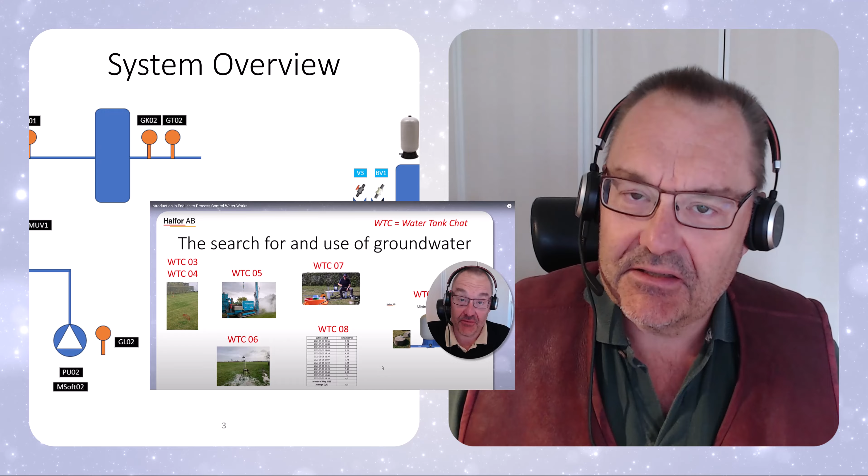Right now, I will hand over to Kjetil Sørhus at Sørhus Program Development, who has done the programming together with me for the process. So, enjoy the video now.

Thank you, Magnus. My name is Lars Kjetil Sørhus, and I run Sørhus Programutvikling in Kristiansand in Norway. I have a degree in process chemistry, and I work with automation and instrumented safety systems, specializing in Siemens PLC equipment. And today I will go through the control system for the Stånga groundwater works and show which main components should be in place on such a control system.

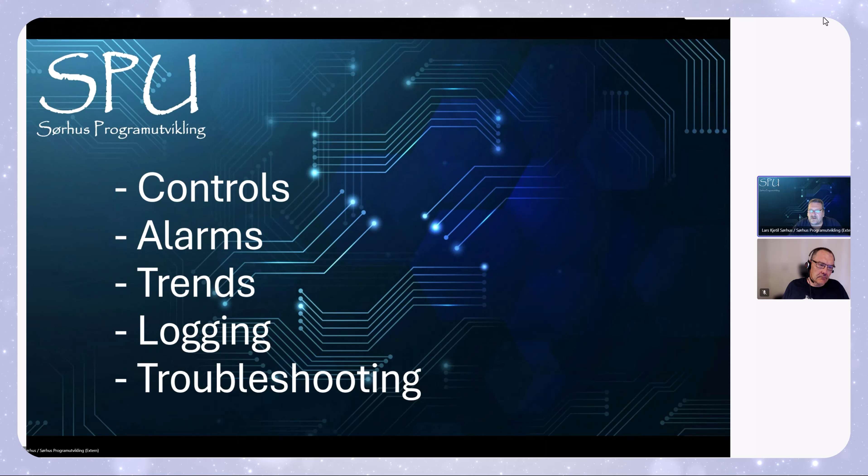I will start going through the HMI, that is the display system for the control system, and then go through the PLC program to show how it is set up in terms of process control and safety functions. And the main areas I want to focus on are controls, that is how the operator is handling the system, the alarms that should be shown in the system, the trends for the values of the system, the logging, and finally troubleshooting. That is how we can help the operator to remedy any problems that should arise during operations. So I think we'll jump straight to the HMI and start displaying how the system is shown to the operator.

Okay, here we see the main screen for the control system. Here we have the information about the hydrofor, which provides the water for the households, with the outlet here. We have the drill hole to the right, and we have the well to the left. In the middle, we have the UV filter, which cleans the water before it enters the hydrofor. On this hydrofor, we have different set points. The green shows the maximum pressure under normal operations, and the blue one shows the low limit pressure under normal operations.

So what happens now, when the consumers are drawing water, the pressure will drop in the hydrofor. And when it reaches 2 bars, it will start the automatic pumping sequence. And to make sure that the quality of the water is as desired, Magnus has calculated that if we draw 10 liters from the drill hole and the rest from the well, the mixing will give an adequate quality of the drinking water.

When it's in auto, it will automatically start with the drill hole, and as the settings are right now, it says pull 10 liters from the drill hole. When it has pumped 10 liters, it will continue to pump from the well until we reach 4 bars, and then both pumps will stop. The UV filter will start automatically when the pumping sequence starts.

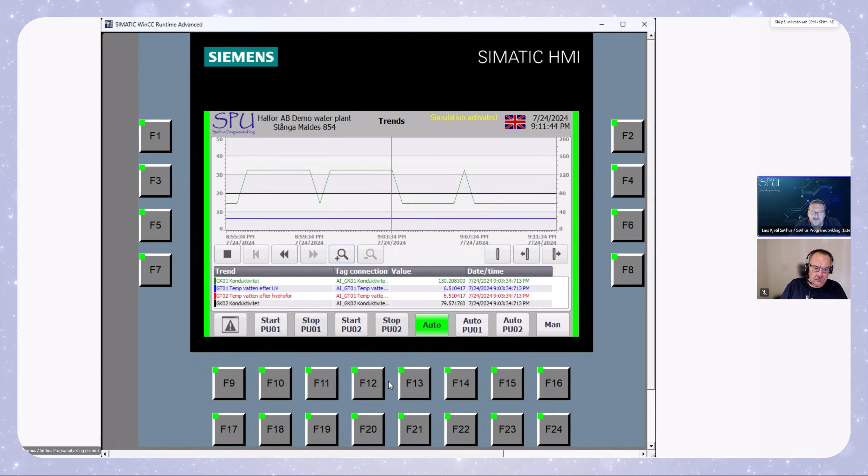Now, the next I want to show you is the accumulators. And we want to show accumulators for how much water is pumped and for how long time the pumps have been running and the UV filter has been running. So we have 2 accumulators for each unit. We have hours total and number of starts total. And we also have hours since reset and number of starts since reset.

So as the text says, hours total is how many hours pump 1 has been running since the system was started. So here's 9.02 hours. It has had 6,119 starts. We can also reset these values. And here we can see the last time it was reset was June 26th at 1:02 p.m.

When we press the reset, all the reset values will be set to 0, and it will start accumulating again until the next time we reset. So we press reset, 24th of July, and we have 0 on these values. So when the pumps start and when the UV filter starts, it starts accumulating again. Number of starts and hours of operation.

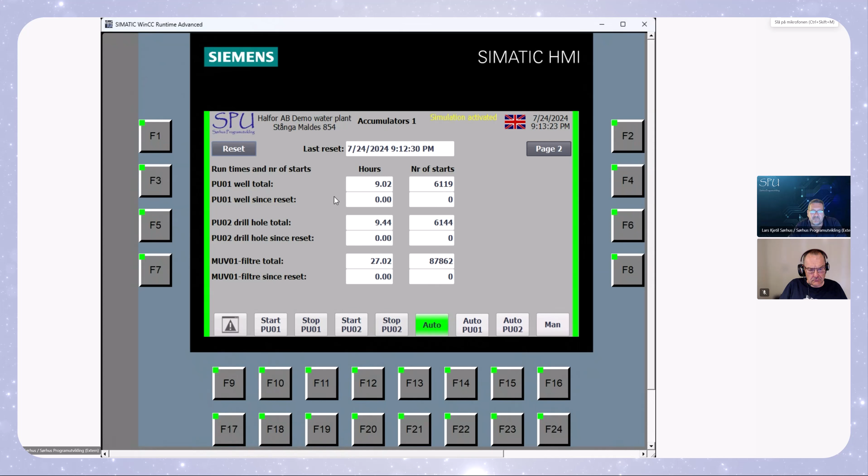This can be good to have, in particular for maintenance. Typically, pumps and UV filters have certain service intervals that normally are per hours or number of starts. We have two pages with accumulators. This is for the pumps and the UV filter. And we also have the total water volumes for the well and the drill hole. In total, we have pumped 169,000 liters from the well and 2,000 liters from the drill hole. And nothing since we reset now 1 minute ago.

Now, the next one I want to show you is the status for the pumps. We have a separate page for this showing pump 1 and pump 2.

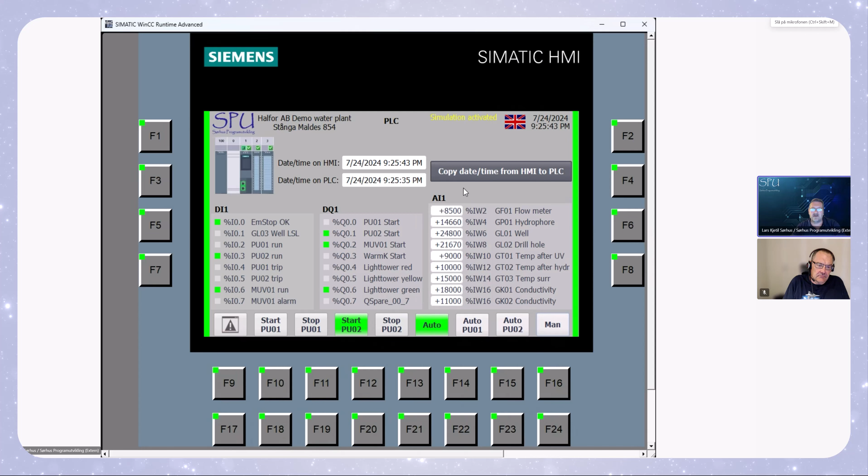Okay, the next thing I want to show is the sequence overview. Now, as you remember, this system runs in a sequence that fills to 4 bars and then drains down to 2 bars and then restarts the whole pumping system. And this is the screen that shows where in the sequence the PLC is running.

Now, a note, these texts are currently only in Swedish. And this is because this is text that is being read from the PLC. It is not a text that is manipulated by changing the language up here. So this will be changed to English language when that is necessary. But this is the reason why it's only Swedish here now.

So to the right here is shown all the steps in the system. To the left here shows which step it's waiting in. Now it says waiting for start. And these lights here show the prerequisites that must be fulfilled for the sequence to continue. You can see now it's 3.55 bars. It's just waiting for the pressure to drop to 2 bars.

So this says here, it's not in manual and the emergency stop OK, it's green. Now it says either the hydrofor requests water or manual starting of sequence. So when the hydrofor asks for water, the sequence will start. I can speed this up a bit so we don't have to wait until it's 2 bars. I can set this one to 11,000.

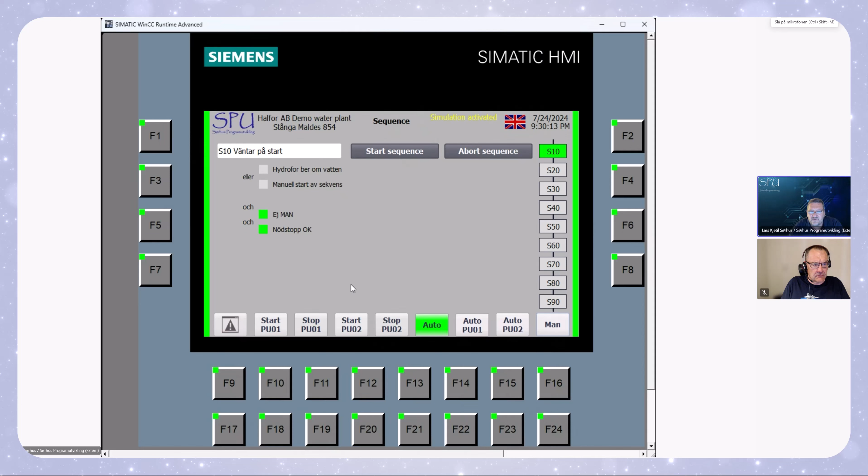As I said at the beginning, one very important part of the process control system is the alarm system. And on this system, we have 3 different alarm and information windows. We have the unacknowledged alarms, meaning new alarms that have not yet been acknowledged by the operator. We have the standing alarms or pending alarms. These are alarms that have been acknowledged by the operator but are still active. And finally, we have the system messages, which is information from the PLC and from the HMI to the user.

I will trigger some alarms now just to show how it's shown here. And what we can do, we can go to the simulator window. Here we can simulate some faults. Let's see, I want to simulate emergency stop. Someone presses the emergency stop on the system. Press active, and we have a whole lot of things happening here.

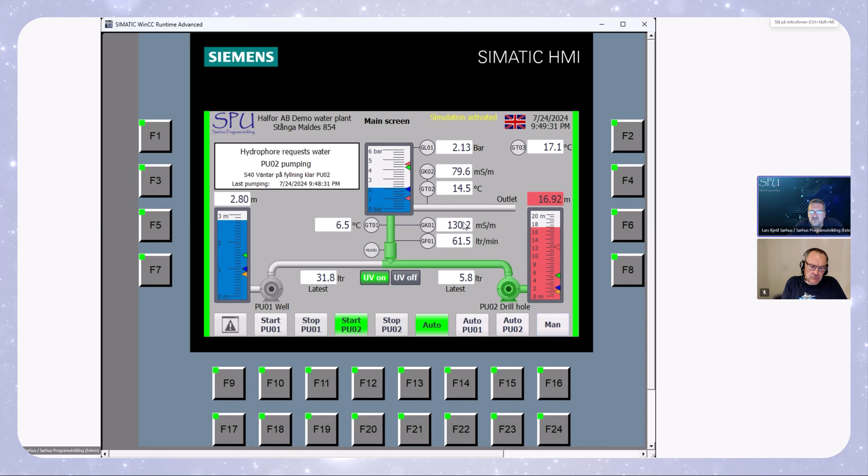Now the final thing I want to show is the simulator. As I explained, all the values here are run on the simulation, and we can set these parameters on this screen. Now all these values are system values or status values on the PLC. These are not engineering units. When it says level 23,000, this is a Siemens value that goes from 0 to 27648, which is the maximum.

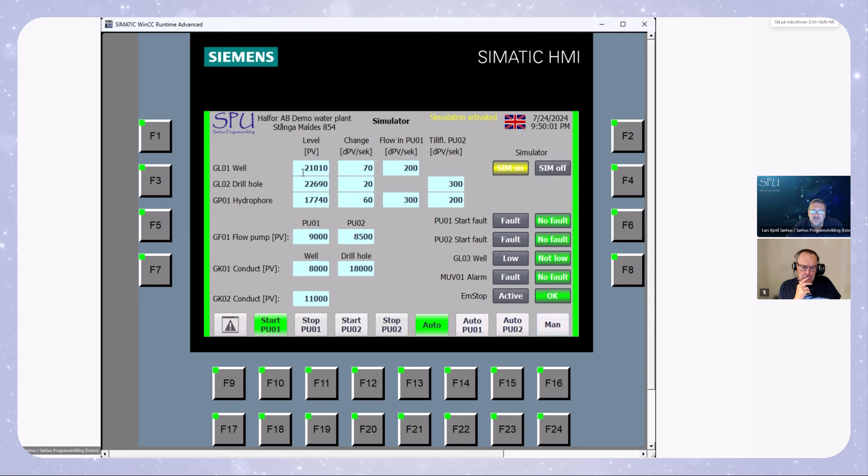So if I want to simulate a low level, say in the drill hole, you can see here now the drill hole has 22,000, which is quite a lot. You can put 1,000 or say 500, a very small number. And then you see, oh, we actually have a low value here.

So these are all parameters that we can use to manipulate the system when we're simulating. This is the level, and this is the change for these values during the simulation. Here we can also set the simulation on and off. So if I go off, it will use the actual physical inputs. But since this is a simulation on the PLC, we have no input, so it will just stop.

Likewise, we can here simulate faults. Start fault on pump 1, pump 2. We can simulate a low level in the well and the alarm for the UV filter and also for the emergency stop. We can try now the low level in the well to see, okay, what will happen if the well went dry? We have a red status. We get the alarm, level 3, stop level in the well.

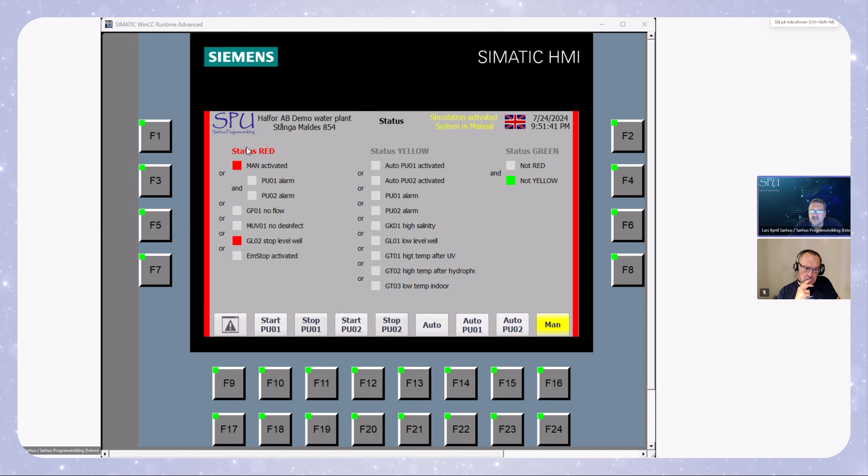You can see here on the F21, the status is red. And we have manual activated. And the reason it's manual is because when you have a stop level or a status red, it's always set to manual to prevent the pump from starting. We have one active alarm, which you can see here, stop level. We can acknowledge it. It's still in the pending alarms. So this is the simulator screen for the system. Reset the value, and everything is okay again if you put it in auto.

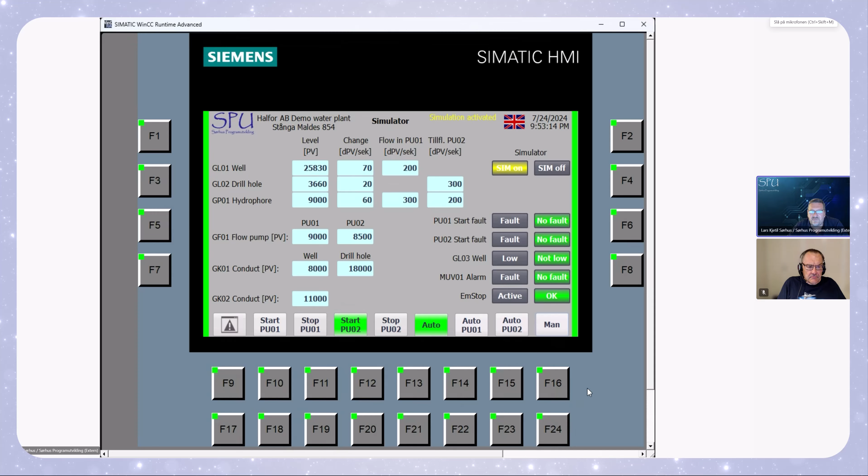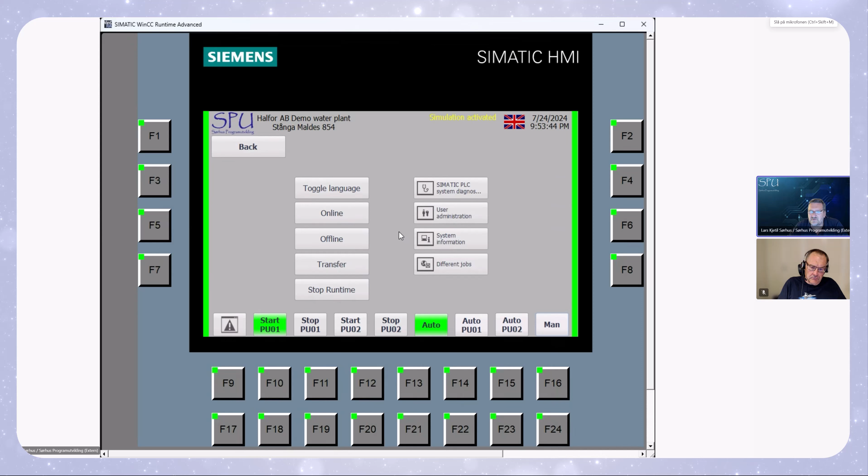But now the final screen on these function buttons here is the system screen. It just shows some information on the project and on the author and description of the plant, and also has some default buttons for the comfort panel. It's like the language toggle, online, offline. You can stop the runtime on the screen. You can have some user administration, system information, and you can also go to the operating system on the screen. It's a bit more technical, but it's all available here.

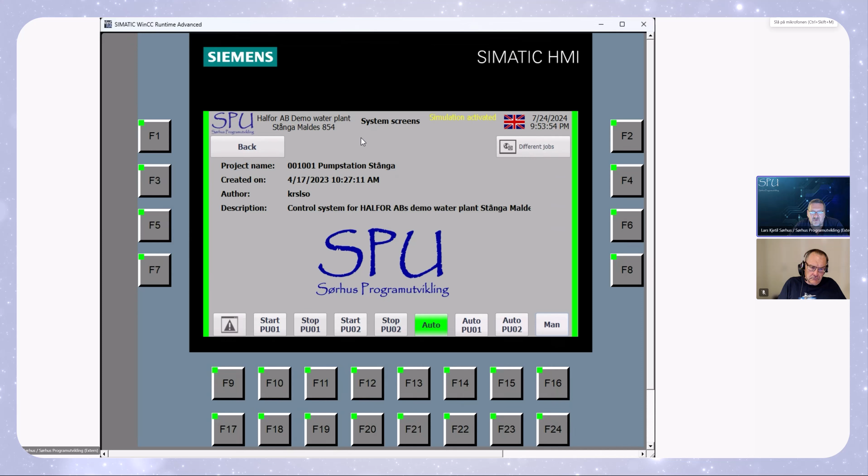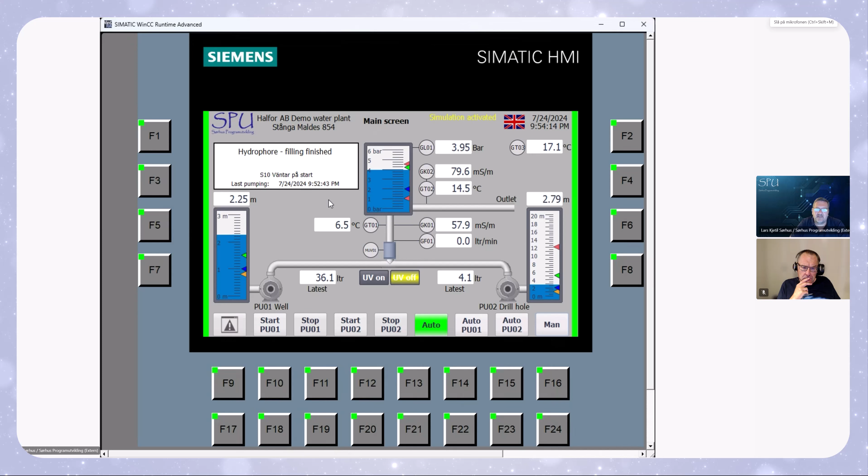Now, the last thing I want to show is export of the logs, because these values are set up to be logged at certain intervals. Some values at the second level, some at 10-second level, and some at maybe 5 or 10 minutes. But to export these from the HMI, I have created a program that does it semi-automatically. If you press F1, it will open the window for export logs to computer. So the first thing we do is we have to stop the logging, push the button. It says here, information, all the logs have been stopped.

Then we take export file. It says here, okay, we have ready to export. Now we remove the USB drive from the comfort panel. On the rear on this panel, there is a USB port, which has a USB thumb drive on it. Now these files have been exported to this USB drive. So it says now remove the USB drive, move the files to the computer, and reinsert the USB drive into the comfort panel again.

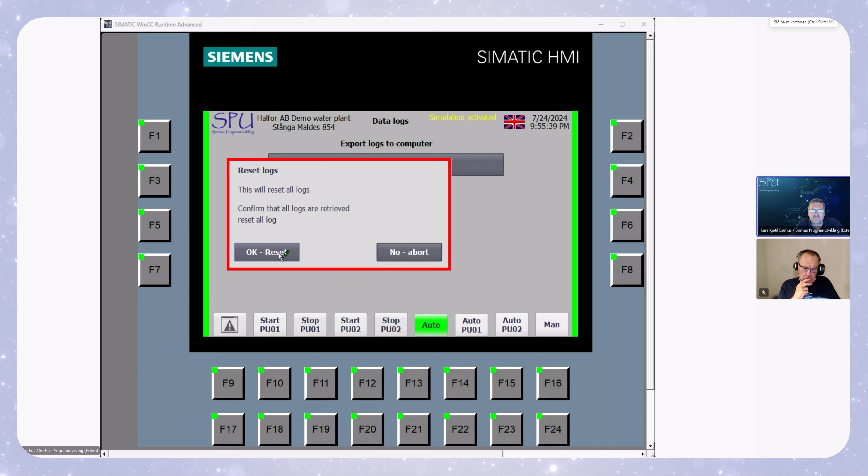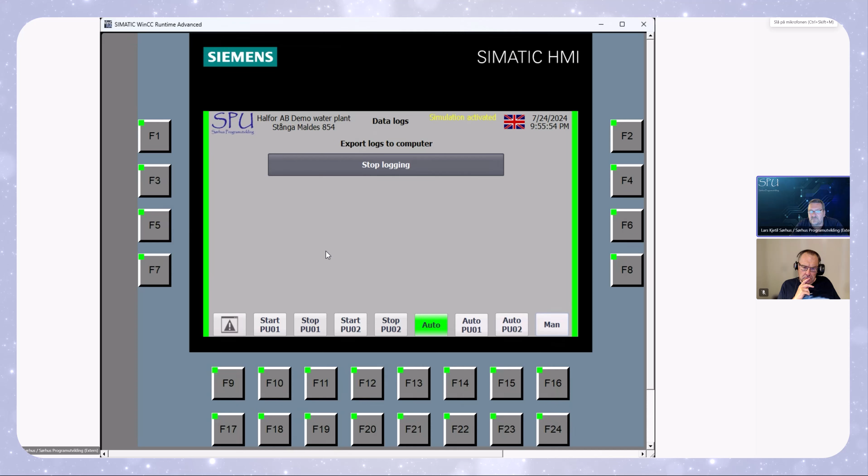When this has been done, you insert the USB drive back in the panel, then you can start logging. Logging has been started, and you want to reset the logs so they don't grow infinitely. So reset all the logs. You get a warning, this will reset all logs, confirm that all logs are retrieved, and reset all logs, yes, reset. So now logs have been closed, and it's started logging on fresh logs. These logs are exported in a CSV format, which can readily be opened in, for instance, Excel.

This was the walkthrough of the operating system on the panel.